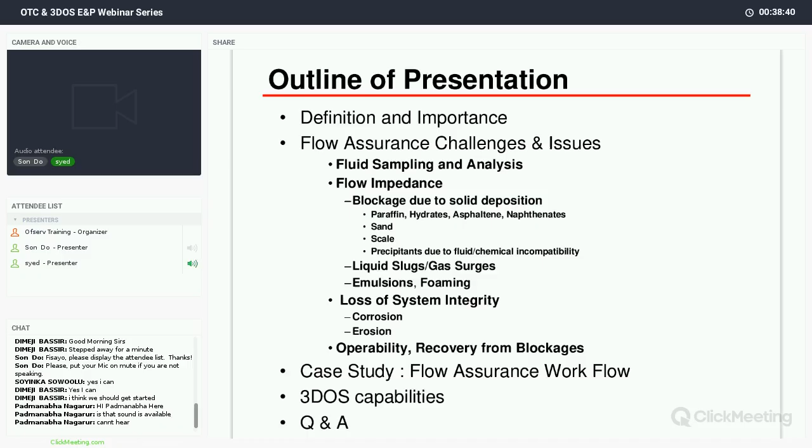Then we will go very briefly into flow assurance challenges and issues, which can be characterized into four areas: analysis, flow impedance - things that cause flow impedance in our system, and things causing loss of system integrity like corrosion, erosion, souring, etc. And finally, operability, operating strategy, and recovering from blockages.

As we go through this presentation, you will gradually get a sense of what all these are and the importance of each. I'll also present at the end a case study of a flow assurance workflow that we did some years ago in a giant field, and finally some comments on 3DOS capabilities. Then we'll come to questions and answers.

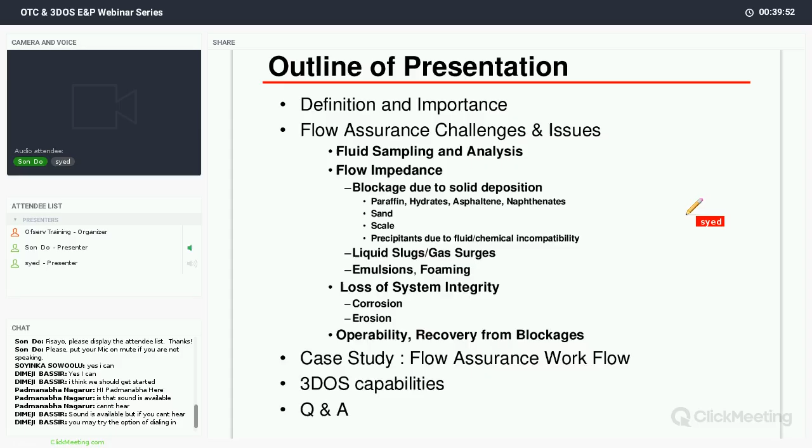Okay, so this is the outline. So we start with definition. Flow assurance includes all issues important to maintaining the flow of oil and gas from reservoir to host facilities through the life cycle of an asset.

If you have to write a sentence to define flow assurance, that's what it is - it's all issues that ensure we maintain the flow of oil and gas from the reservoir over the economic life of an asset. In the original reservoir state, the hydrocarbon and whatever is in the rocks and formation water have been in equilibrium with its environment for millions of years, for geological time. If we don't disturb it, they are in equilibrium. During production, we disturb this equilibrium, and disturb it rather abruptly.

As the hydrocarbons and water come out of the reservoir to the production system, the fluid tries to reach a new equilibrium in the changing environment. In doing that, there are phase changes which occur - for example, gas breaking out from oil, liquid hydrocarbon condensing from gas. But more importantly for flow assurance, it's the solids that form as the equilibrium is broken. These solids are sometimes very nasty and they can stop your production.

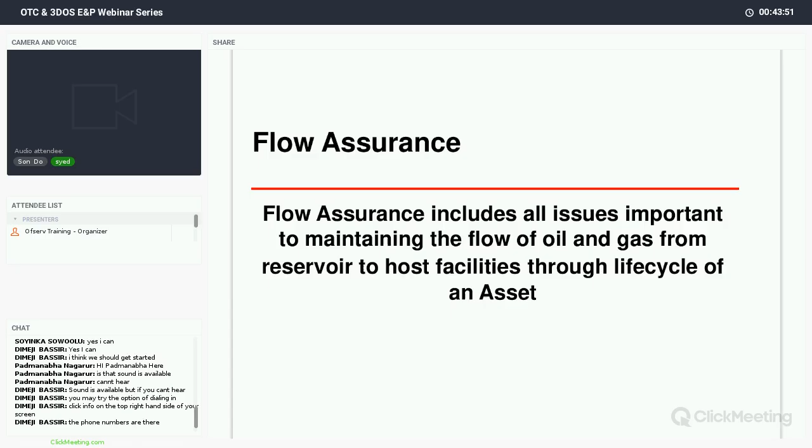So for example, in this slide I'm showing some of the flow assurance challenges that happen, what type of things can happen, and we will go through some of these in some detail. This is a vast subject. Flow assurance is a vast subject, and to really cover it properly you need a 5-day complete course. But I'm just giving you an overview to give you a feel for what can happen.

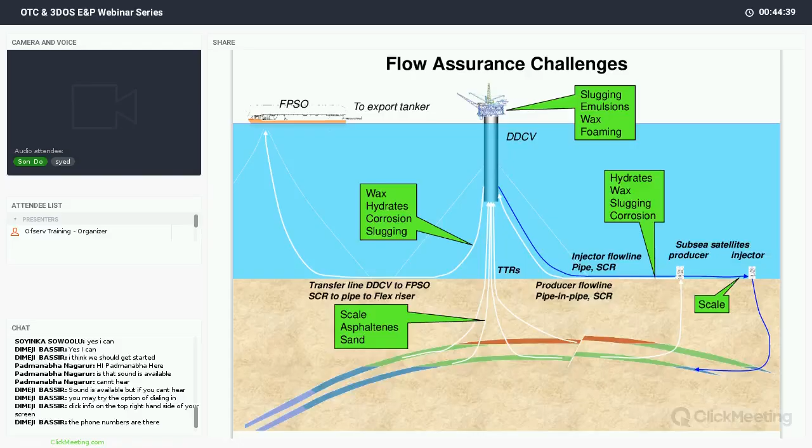We have these well bores, and in the well bore we can have asphaltene, we can have sands, and then as they flow into the production platform, in the platform you can have slugging, you can have emulsion, you can have wax, your fluid can foam, and all this causes impediment to flow.

And then during the transfer from the production platform to the FPSO in the transfer line, you can have wax, hydrate, corrosion, slugging. These flow lines are sometimes very long and they are at low temperature at the mud line, so it can be a problem. And anytime you are injecting water and mixing two incompatible waters, you can have a scale issue.

So these are the type of problems that, any one of them, if not taken care of properly and systematically, can kill your production and cause a shutdown which can last for months. So lost production.

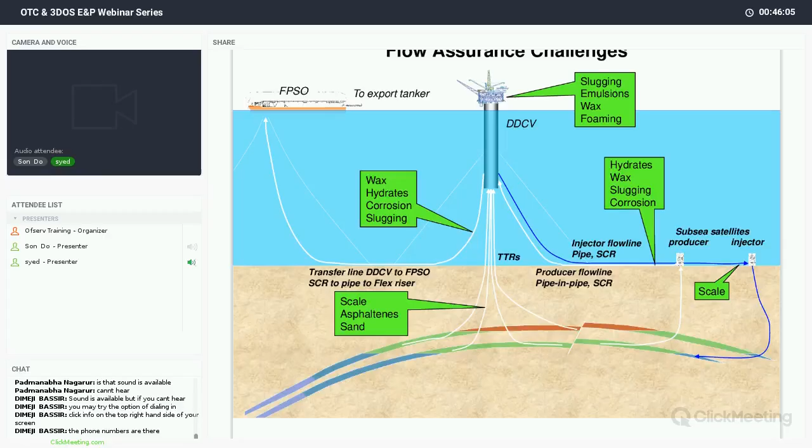So next, of these flow assurance challenges - if you have to take care of these, what do you need to do?

So we need to design, for example, starting from the reservoir, you need to design proper tubing size. You need to insulate it. In some cases, depending on the threats that you have, that I showed in the earlier slide, you may end up doing one or the other of these things.

At the production platform, you should have provision for receiving slug. You should have provision for heating, chemical storage, injection water treatment if you want to avoid scaling. And in some cases, you are required to have insulation in the flow line.

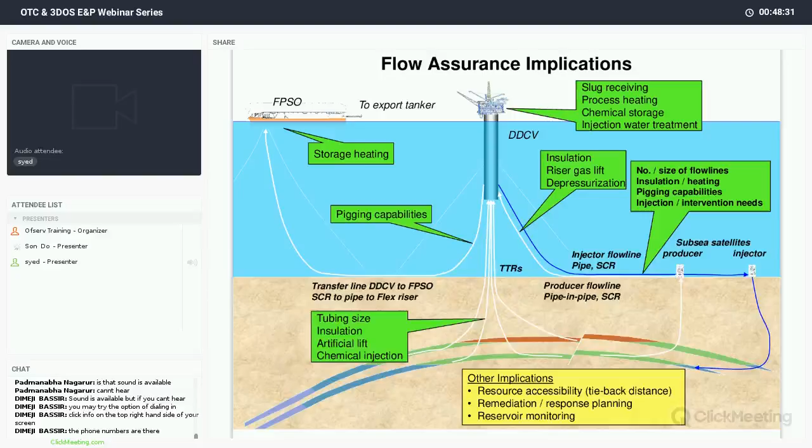So what is the scope of flow assurance? What do we do in flow assurance activities? The key to handling any flow assurance issue is fluid behavior and properties. That's the key, because most of these issues are occurring because the fluid is going into disequilibrium and then precipitating and depositing things. So we have to understand very well the fluid behavior and properties.

Production chemistry as a subject is very important that we need to bring into flow assurance. The other subject is fluid flow in wells, flow lines, risers, umbilical tubes, export pipelines, etc. So we need to analyze fluid flow and multi-phase flow.

Techniques. So the impediment to flow can happen due to blockages, due to solid deposition - hydrates, paraffins, asphaltene, scale, sand, precipitants. Also your flow can be affected by liquid slugs and surges, emulsions, foaming, loss of system integrity, corrosion, erosion, and reservoir souring.

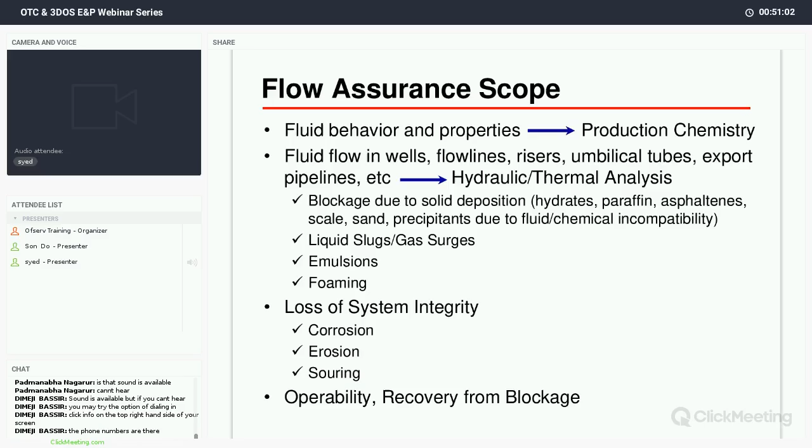So, what are the technologies and science that we bring to solve flow assurance issues? The first is hydraulic analysis.

We need to study this, and sometimes in the deep sea systems, fluid flow in the risers, to understand what's happening there.

Combined with hydraulics, we need to also study the system for thermal analysis - what are the system temperatures, whether we need insulation or active heating requirements, because to prevent some of these solids from coming out and depositing, we need to keep a minimum temperature.

We need operability investigations - warm up, cool down, blow down. These are the things that we do during operations, slugging, and we define strategies on how to implement it.

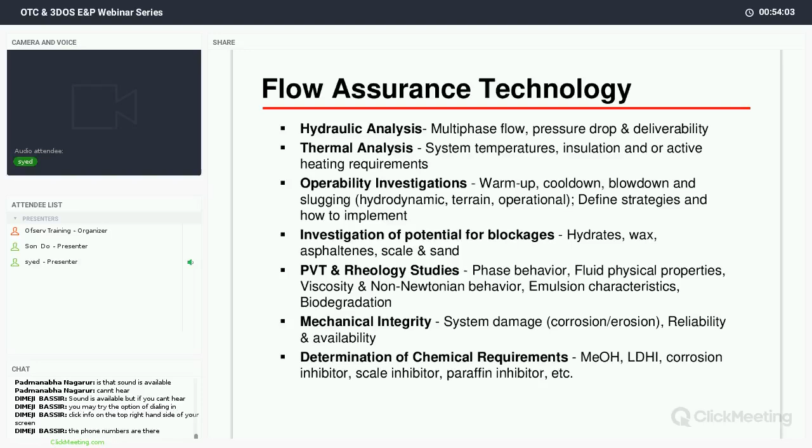Flow assurance also interfaces with almost everything - reservoir, topsides, risers, flow lines, pipelines. In big companies, flow assurance is handled in research departments, marine, exploration and operations, and well completion. So you can see the interface.

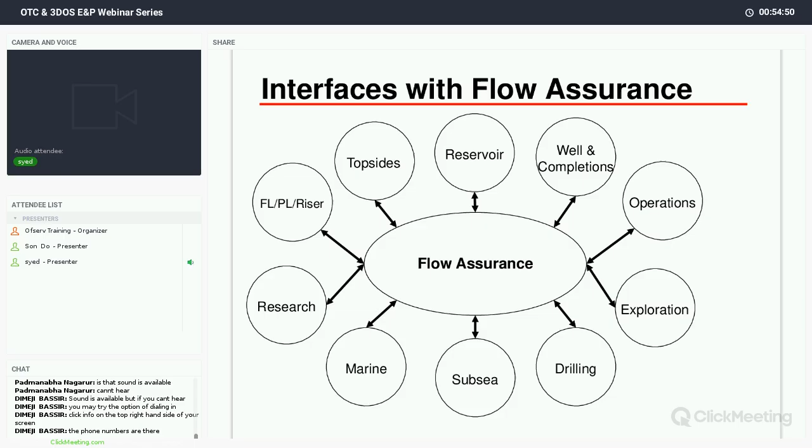Flow assurance is an issue for the complete system - the complete oil production system, the hydrocarbon production system. So it has to be handled in a systems manner. Integration of the system is very important.

So I'm giving you these general ideas about flow assurance, and then I'll come to a couple of solids that are commonly encountered, and then I'll give you case studies as to the workflow - what do we do when we are faced with a flow assurance problem?

Some considerations for flow assurance: it must consider capabilities and requirements of all parts of the system. You have to start from the reservoir and go through the whole system until you store the produced fluids and transport them outside. If you leave any part of the system as a weakness, that may become your weakest link.

And you have to consider the entire producing life of the system. This is very important - I have seen in flow assurance studies that people tend not to consider the entire production life. They just consider what will happen in the beginning. Fine, in the beginning your flow rates will be high, so things may be okay. But once production flow rates drop to a certain level, certain issues arise - like wax. Wax is deposited only at relatively low flow rates, later in the life.

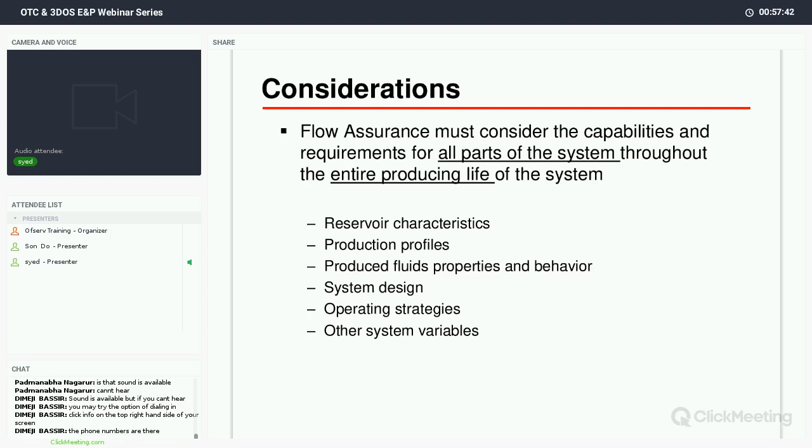A systematic flow assurance study, if there is a new development, gives lots of input for the design of the system. For example, flow diameters of tubing and flow lines, maximum and minimum production flow rates that you can target, insulation requirements - whether you need to insulate any tubing, flow lines, wellheads, trees, and manifolds - chemical injection and storage requirements. So this is all input to the design of facilities, production platforms, or onshore facilities, and flow blockage intervention needs. So it's very important.

In the system design, you have to accommodate what will be needed if there is a blockage. Host facilities requirement, flow receivers, fluid handling, pigging, blockage prevention, intervention - all this for the host facility, you have to get.

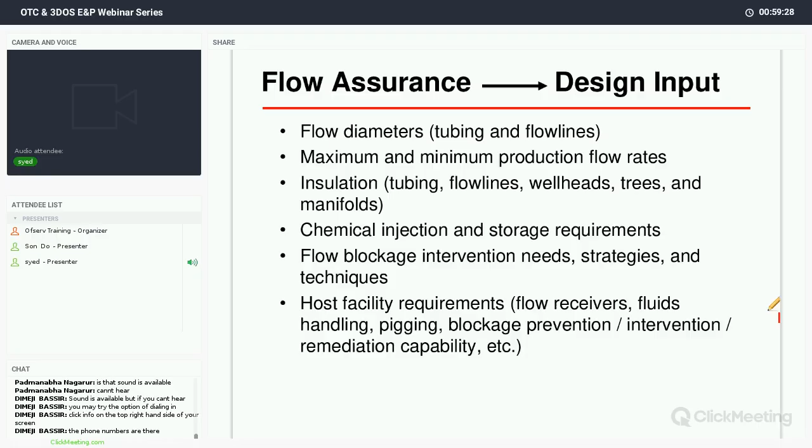A systematic flow assurance study gives you parameters for your system design - what should be in your system. But then, on the other hand, it also puts some parameters so you can assure that the system can be built and operated successfully and economically.

Parameters are set at the beginning of the system design, and that leads to operating strategies, and then the operating strategies eventually lead to actual operating procedures and manuals. Flow assurance study has to develop a robust operating strategy and procedures, considering unknowns and uncertainties, all production modes - startup, steady state, rate change, and shut-in.

There have been a number of cases with specific issues - steady state, and if you change a rate, sometimes flow assurance challenges kick in during operations of your system. In fact, there have been cases where a field was producing fine for a long time, and then they shut in and then could not bring it back easily. It took them 6 months to 1 year to bring it back. This is because of flow assurance issues.

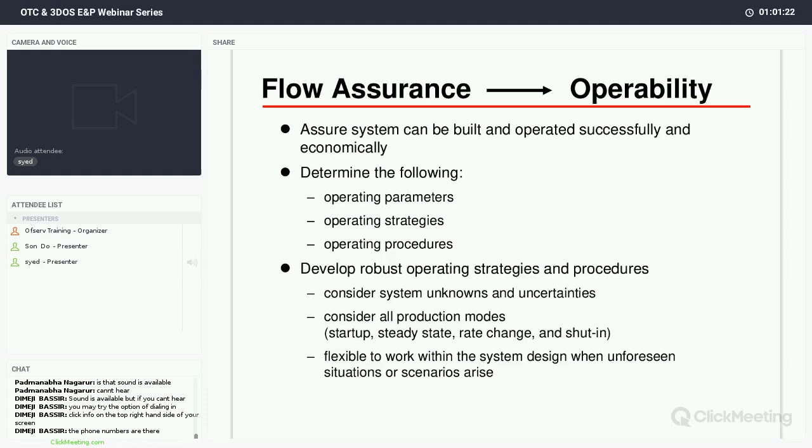So this is about flow assurance. Next, I want to give you a feel for what some of these solids are. There are 6 solids that occur in hydrocarbon systems, and these are hydrate, wax, asphaltene, scale, and diamondoids.

I have taken 3 of them which I have dealt with quite extensively in North Field, Qatar, and hydrate was a big issue when I was there, so we had a project handling hydrates. That's where I developed my expertise.

So hydrate, just to give you a feel for what it is - they are crystalline, a crystal cage, and this organic molecule - for example, here is shown a cage of water molecules that have captured a C1, the methane.

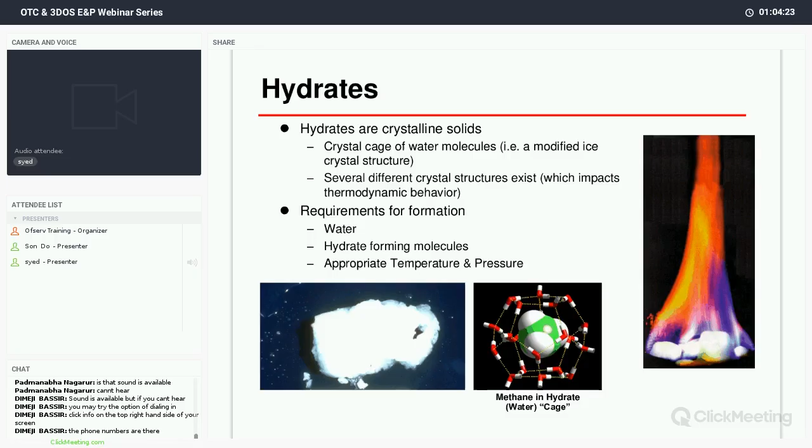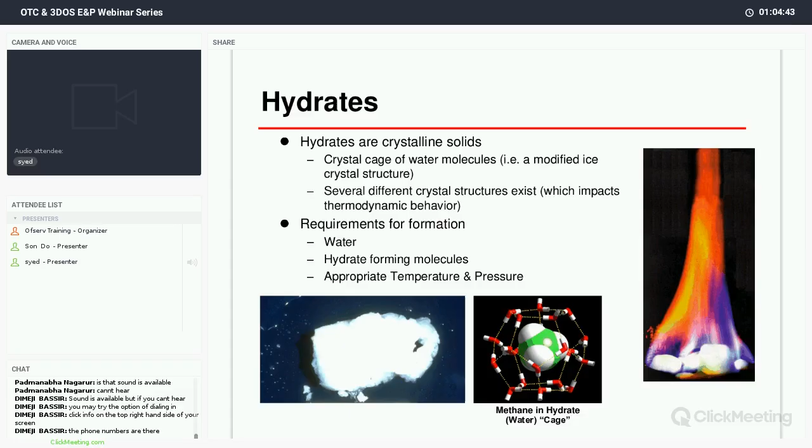If you look at hydrate, they just look like ice. But the only difference is this ice, if you light with a match, it starts burning, as is shown on the right. So hydrates is a common problem in oil industry and all systems, especially gas producing - it is a common problem.

So the best strategy is not to let it happen. In your design phase, you need to take care of it in precision. You need to have a concept of whether you want separate flow streams, and have it only a dry pipeline or a wet pipeline. You need to consider insulation requirement, chemical lines - hydrate can be prevented by injection of chemicals. So you need to provide for chemical lines, injection points, storage, pumping capacity. You also need to be ready with the operational procedure in case hydrate blockages are formed - provide all that to handle your hydrate problem.

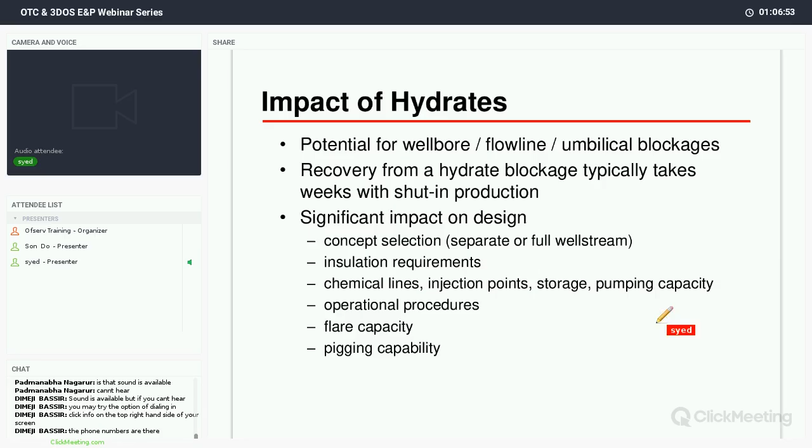So the operating envelope becomes much higher. Thermal methods: insulation or active heating. Chemical: you can inject thermodynamic inhibitors, and there are a couple of kinds. Pressure: you have to operate at lower pressure, and during shutdown you need a provision for depressurization. Composition: you can also prevent hydrate if you just dehydrate. If water is not available, hydrate will not form. So this in a nutshell is hydrate formation.

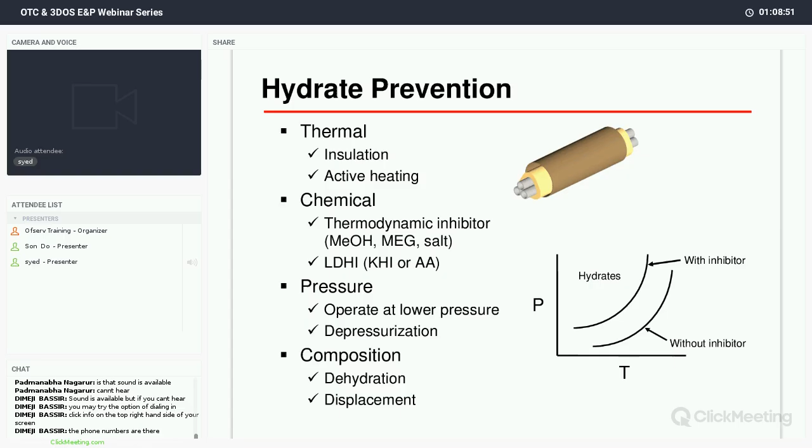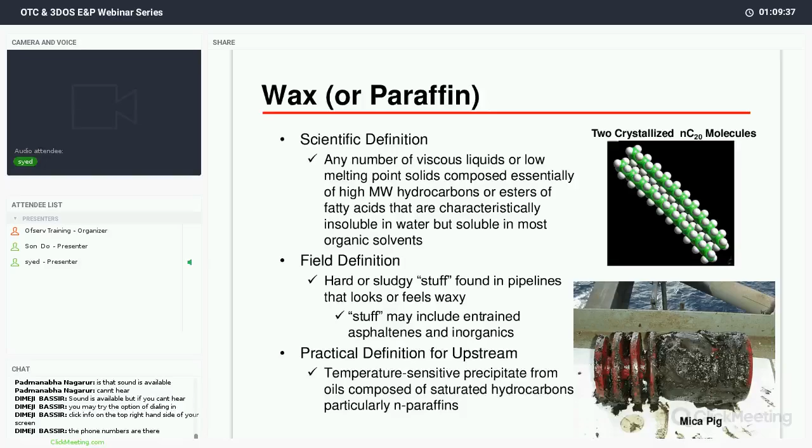So that's one solid. The second solid that probably everybody has heard of is wax. So we have waxy crude, which have long chains of N paraffins, and they can be defined in a certain way. Their scientific definition is hydrocarbons insoluble in water but soluble in most organic solvents. The field definition, so that's the scientific definition, that's something for people in the research lab. The field definition is hard or sludgy stuff found in pipelines that looks or feels waxy. So this is for operators, people in the field, that's the waxes.

And sometimes what they say is wax is actually a combination of things. It may have asphaltene in it. It may have scale in it. So anything that becomes kind of sludgy stuff in the pipelines and looks kind of a certain way is the practical definition for upstream.

So the definition is from oils composed of, in your composition, if you have high molecular weight and long chains, they are very sensitive to temperature, C20, normal C20 molecules. And this is how wax looks like. And in the field for operators, this is what wax looks like. So this is a pig that has come out of a pipeline which had wax deposits in it.

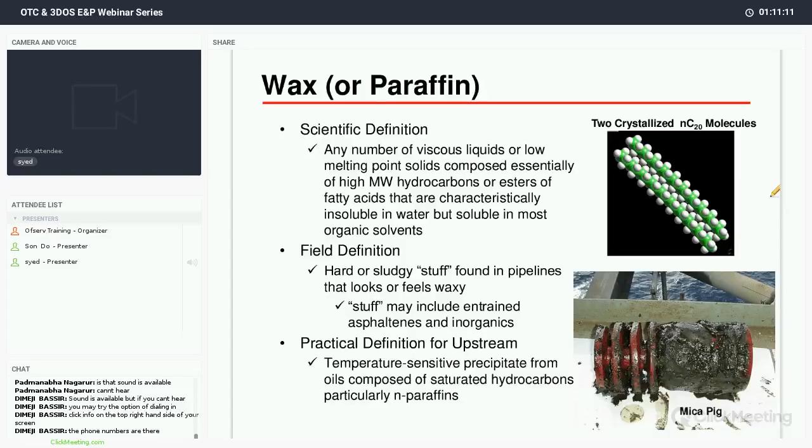So wax deposition is strongly related to outward heat flow, so you insulate your system so that you don't have an issue. Deposition requires outward heat flux even if the oil is below a temperature below which wax tends to appear. Wax deposition is a slow process, so it does not happen very quickly. It only happens over a period of time in the pipeline. In a long pipeline, it only happens after flow has traveled a distance. Sometimes after miles of flow, then it starts happening.

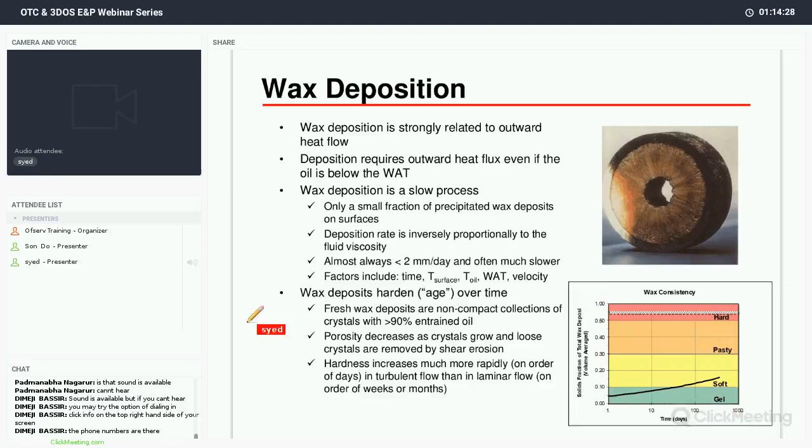So how do we manage wax in a system? This is a topic for flow assurance. Again, there are three methods: chemical methods, thermal methods. When we deal with solids, these are the three things that you can do to prevent them, and the best thing in any flow assurance issue is to prevent it. Prevention is better than cure.

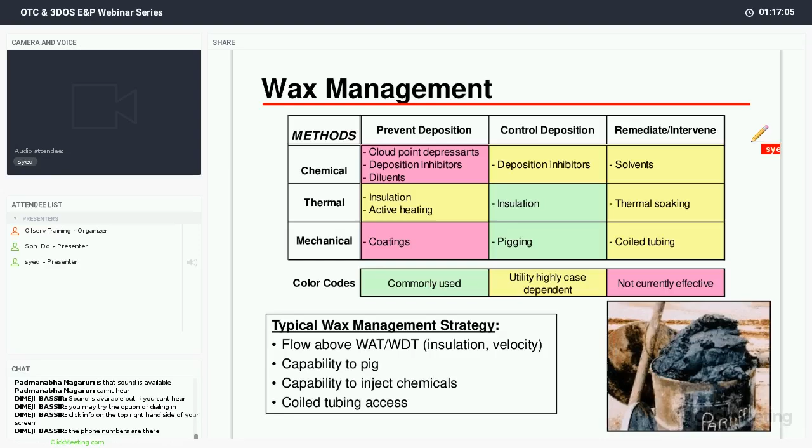So next is the solid I'm going to cover, which is asphaltene. I have worked on asphaltene in the Upper Zakum field, a very huge offshore field, 60 million barrels. When we started injecting miscible gas in it, we had a big asphaltene problem. In fact, the wells were so obnoxious that we had to shut down some of the wells.

Asphaltenes are very high molecular weight polyaromatic compounds, which have a chemical definition. They are not soluble in N-pentane and N-hexane, but they are soluble in higher aromatic compounds. They are most likely to precipitate in the reservoir as fluid is depressurized towards bubble point, or as saturated compounds are added to the liquid phase.

So there are two ways asphaltene can be in your oil and cause a problem. In fact, the issue of asphaltene has nothing to do with the amount of asphaltene present in the oil. In heavy oil, sometimes asphaltene is up to 9 to 10%, but it never causes a problem because there are also solvents. You either decrease the pressure or you bring some other lighter fluid and mix it with your oil.

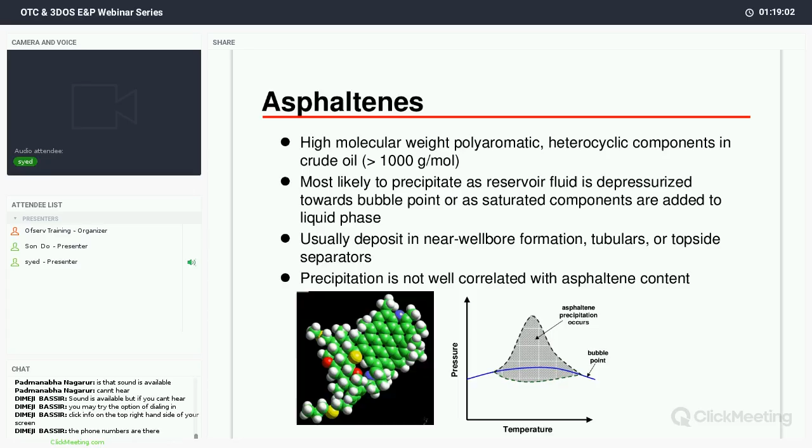And they usually deposit in the near wellbore formation, not well correlated with content. So I already said that.

I'm currently working on an asphaltene problem actively for a field in Pakistan, the Adhi field, which has this problem. This problem was there and they could have actually detected it at the early stages, but they didn't. They kept producing, and now they are at a stage where they have to change their filters in the surface facilities every 3 hours to maintain their production, and it's getting worse. So they want to know what needs to be done.

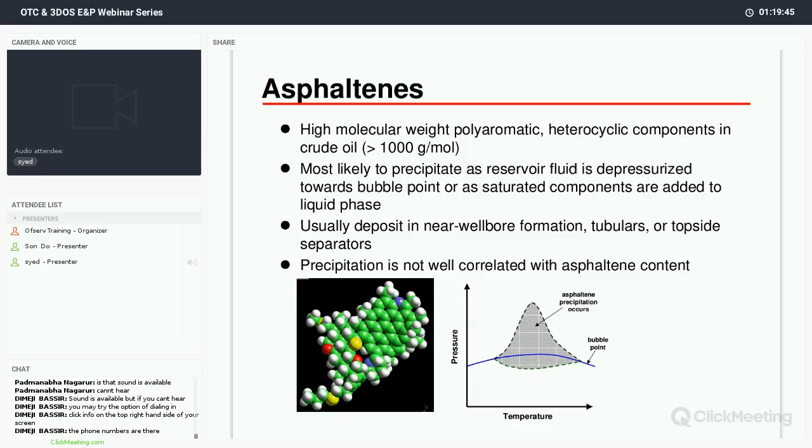So there are certain specific measurements that we do for asphaltene screening, and you probably heard of this. Fluid testing is a must. Fluid is the key to any flow assurance problem. If you haven't characterized your fluid, haven't collected good samples under in situ conditions, and have not analyzed them properly, then you are not set at a later stage to analyze. You can only do remediation, mitigation, but you cannot probably prevent it.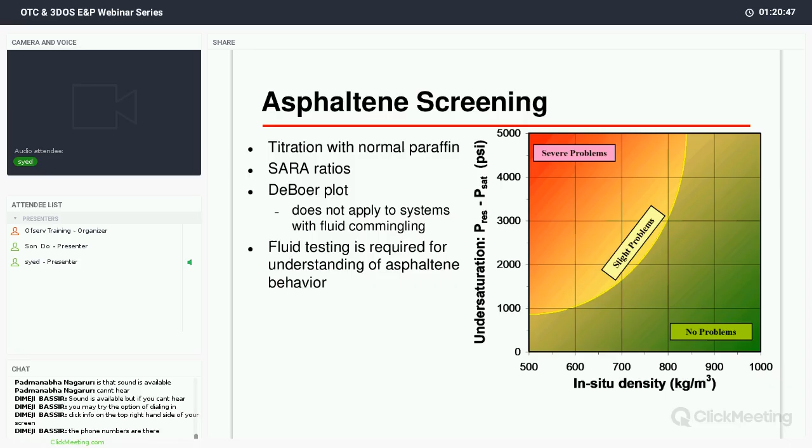So here in this plot, the De Boer plot: very simply, you can take your composition and characteristics of your reservoir pressure, bubble point pressure, and density, and you can screen. If you are here, there will be severe problems. If you are here, there will be no problem.

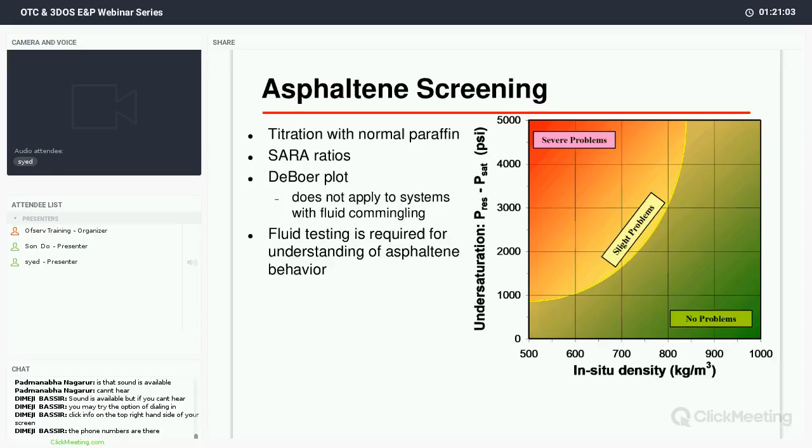So for asphaltene management, prevention is key. You need to watch your producing conditions, rate, pressure, temperature, GOR, and don't mix two incompatible fluids, because asphaltenes are then destabilized and come out of solution.

For remediation, it can be dissolved slowly using solvent treatment, xylene, and these are just details of the treatment. You can also mechanically mill or scrape, or jetting is required. It's difficult to remove, difficult if it happens. So the emphasis is on prevention.

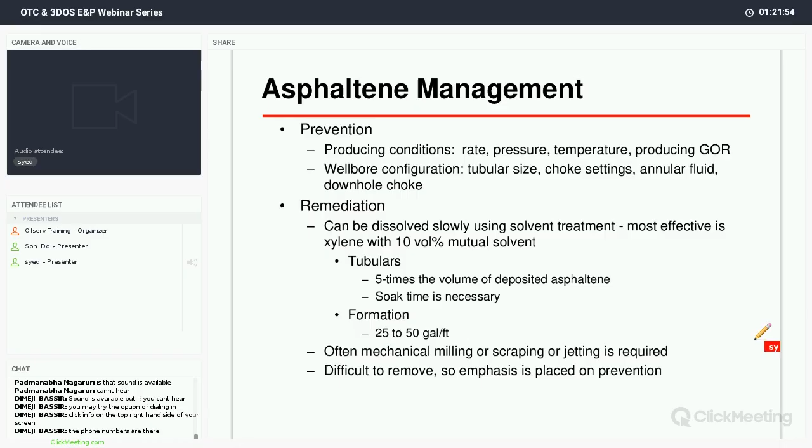Okay, the final solid that probably all of you have encountered, if you've worked in the oil field, is scale. Scale is just any hard inorganic mineral constituent of water that can potentially accumulate on a surface in contact with water. This normally happens when you bring together two incompatible waters. You inject seawater with lots of sulfate in it, and it mixes with formation water, and then these things precipitate.

Some of these are just so hard. Strontium sulfate, for example, is a type of scale that's so difficult to deal with. Once it happens, you really have to take your tubulars out. Nothing you can do. So this is another flow assurance issue.

So we have not gone into detail on any of this. I just wanted to give you, for some of you who have not dealt with these issues before, an overview of solids. You have to have a detailed workflow to understand and then go and solve it.

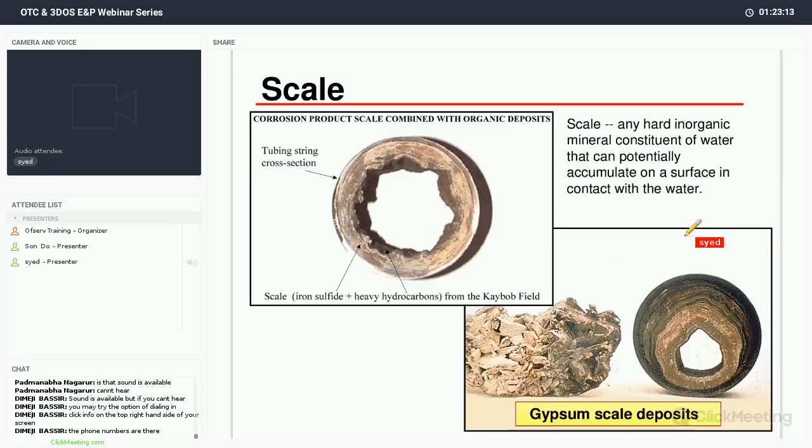So finally, I have given you so far in this webinar the definition of solids which bother us in oil field production. Finally, I'll go into an old case just to show you - don't look at the details, but see how it's done, what steps we take to do flow assurance for a project.

We have a large field, a huge sequence of reservoirs: T13, M series, K60, K70. These are different zones with different types of fluids. In this sequence you find all kinds - lean gas in T13, M series zone has near critical fluid, K60 gas condensate, K70 oil.

The wax deposition tendency in lean gas is none. If you have lean gas, the wax... gas condensate again is low, it's not there, and oil can be high. So there is a range of wax deposition tendency.

So originally this was a flow assurance issue, but when we did all this analysis, we came up with a lot of other things. This was a range of wax deposition tendencies - low in gas condensate, none to low in lean gas, to high in oil and near critical fluid.

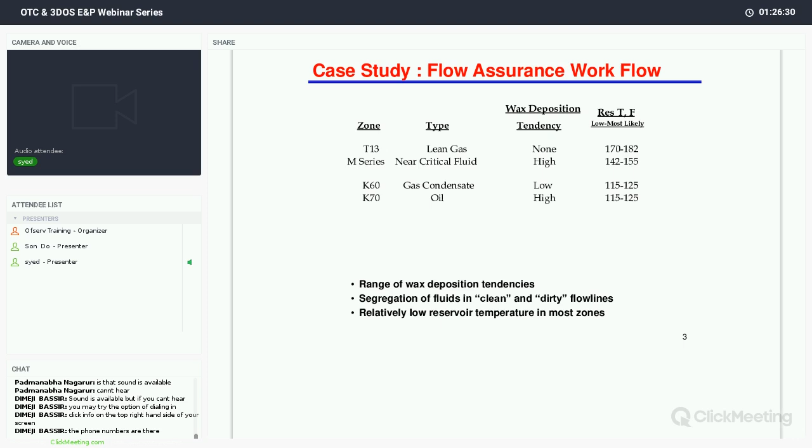The reason this study was commissioned was to find out, since they'll be producing from all these zones, whether we should segregate fluids into clean and dirty flow lines, or flow all of this in one flow line. That was the key question. Clean means flowing all fluids with no wax or hydrate tendency in one flow line, and dirty flow lines are separate. So this was the problem.

The first step in any flow assurance issue is sampling and measurements. The key to flow assurance is good characterization of your fluids in the system, and that comes only from PVT analysis. PVT analysis is normally done to create a reservoir equation of state for reservoir simulation, but for flow assurance you have to go beyond that - you have to do extended composition analysis.

There were a lot of tests specified - pour point, cloud point, asphaltene content, sulfur content. But note these were conducted only at 2 wells, for two zones, and for the others a subset was done because they were considered representative - for example K70 results were considered to represent K60, and M50 results were considered to represent M30 and M10. So for certain key wells, a very detailed analysis was done.

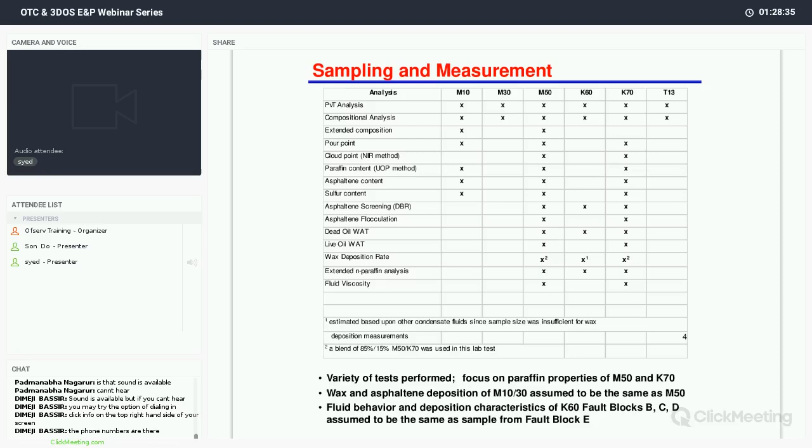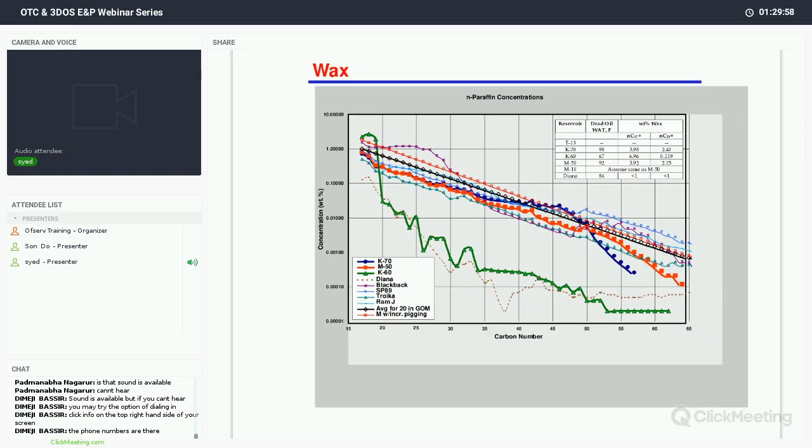With this type of analysis, I don't want to take you into too much detail here. If we had a course for 5 days, I could probably go into detail of each of this and work it out, to tell people what's happening.

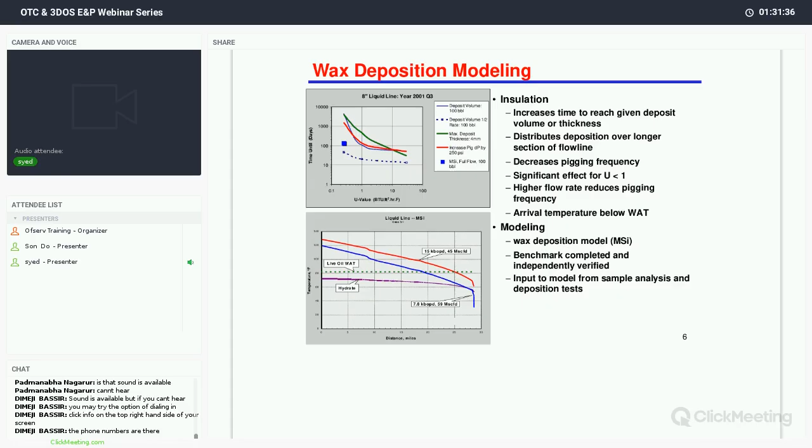And similarly, we do modeling. So after we do these experiments, there is very specific software called wax deposition model, and it's compared with experimental results from the lab. After all that, certain suggestions were made about how your pipeline should be designed, considering the wax appearance temperature. You can have a line up to 20 miles, after that we will have wax issues. So these kinds of things were established.

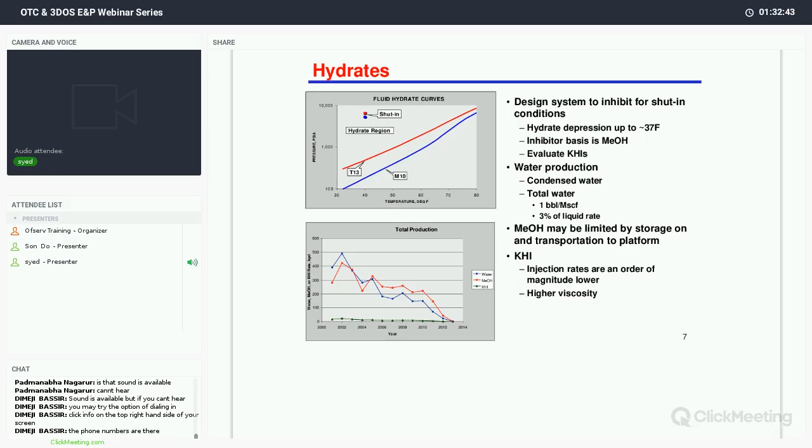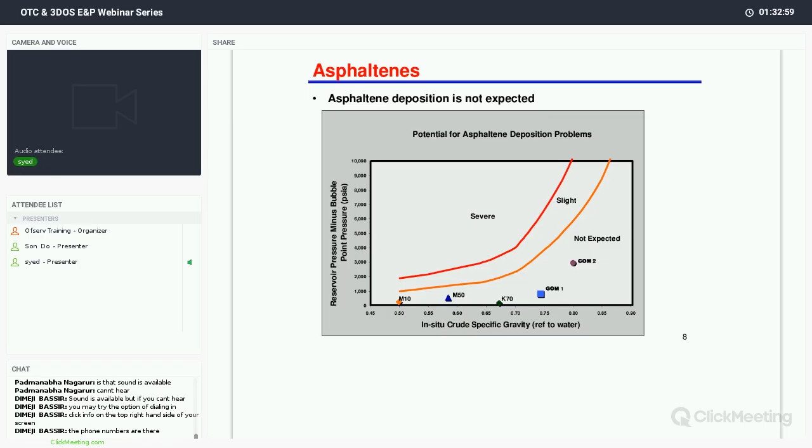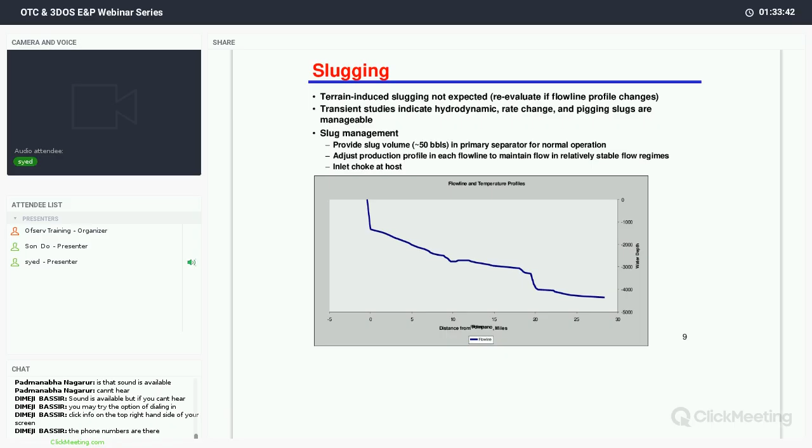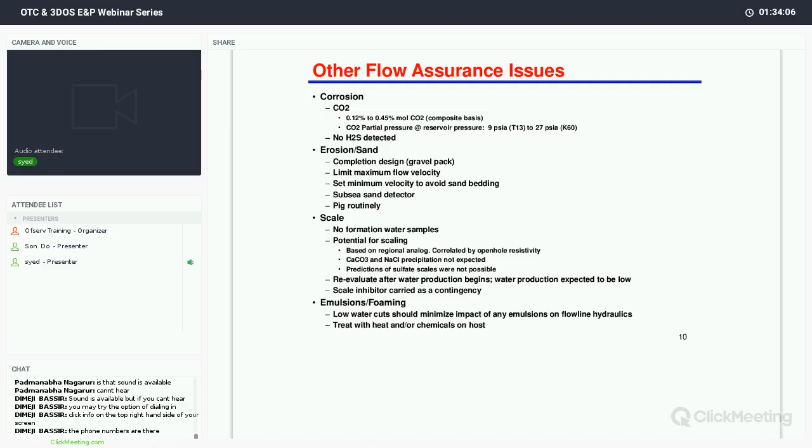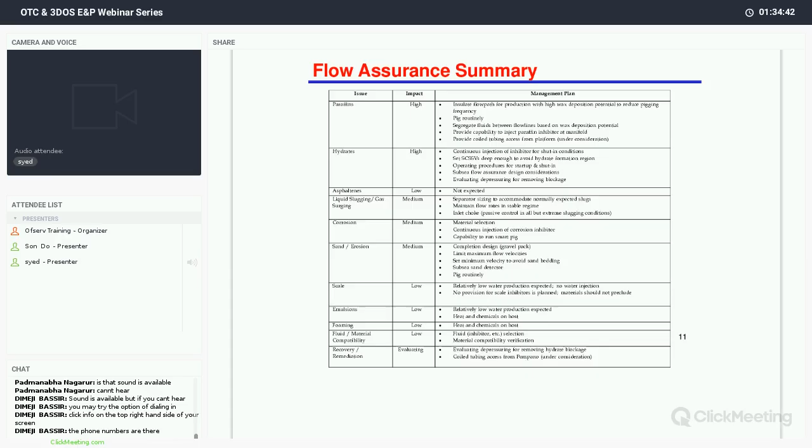As part of the issue, we also considered other issues like corrosion. This was a comprehensive flow assurance study that created a lot of successful design parameters and operability. This is a summary of everything concluded: paraffin impact is high, hydrate impact is high, asphaltene impact low, sand erosion medium, scale low. End of a successful flow assurance project.

Having said all this, any flow assurance project is multidisciplinary. It involves a lot of skill sets which not one person can know on the surface, even with a lot of experience, 40 plus years experience you're exposed to almost everything. But it really requires a lot of interdisciplinary work to do a successful flow assurance.

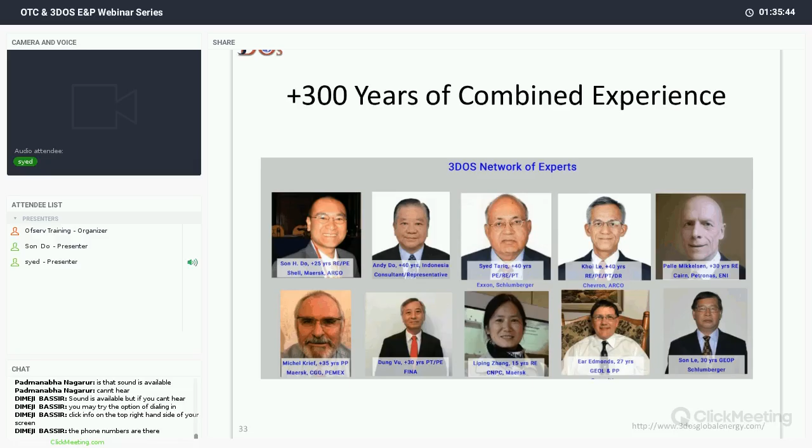Now come to 3DOS. We have some very experienced professionals in our team, with 300 plus years of combined experience. Son Do, myself, Khoi, we all handle this production and capability of flow assurance. So if a flow assurance project is there, we can handle it. And we have global experience - we have experience in Alaska, I have experience in Qatar and Abu Dhabi, and in Chad, very close to here. So we bring this global experience together for the local solution.

Final thoughts. Before you leave, you can think about this and impress your boss by asking, have we looked at this current and in future? As I said earlier, when flow rates are low, problems start happening. I'm dealing with one of these problems now in a 300 million barrel field.